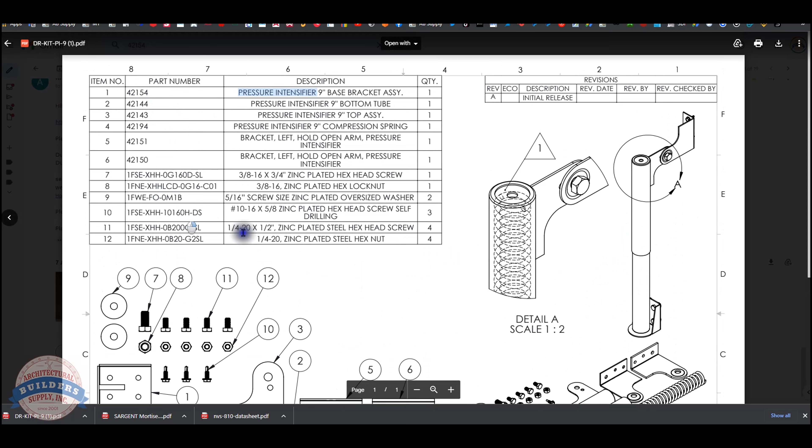All the part numbers are listed here, so if you're on a search or a hunt for replacement parts to get your unit back up and running, you will definitely want to leverage this parts drawing to your benefit.

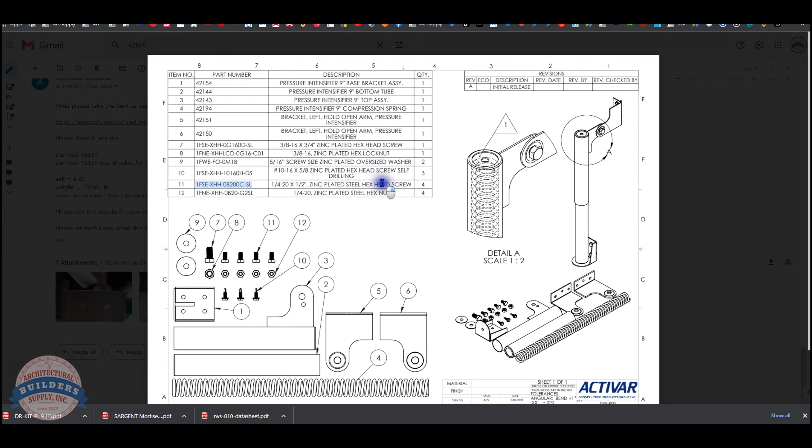When you purchase a pressure intensifier, it's not going to automatically come with this bottom tube, the base bracket, or the lid bracket, so you're going to have to pick those up separately in most instances. It also doesn't include the fasteners, so you're going to need to pick up probably this number 11 quarter-20 by half-inch zinc-plated steel hex head screw. That's probably what's going to be there. I'm quite sure of it.

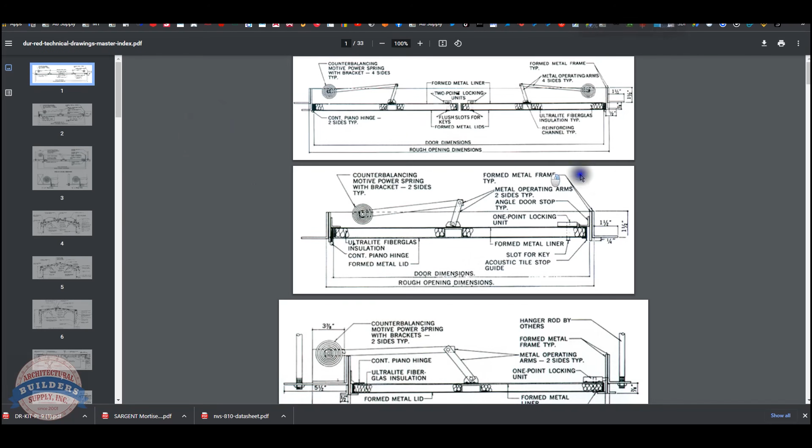Anywhere on the website where you can find the manufacturer's link, you can click on that, and then do a find function on your keyboard for Dur-Red. This link will allow you to review all the Dur-Red products we sell by means of this horizontal navigation, but also a link to the manufacturer's website, and a link to the Technical Drawings Master Index. It will show you several cross-sections of what roof hatch material looks like from Dur-Red.

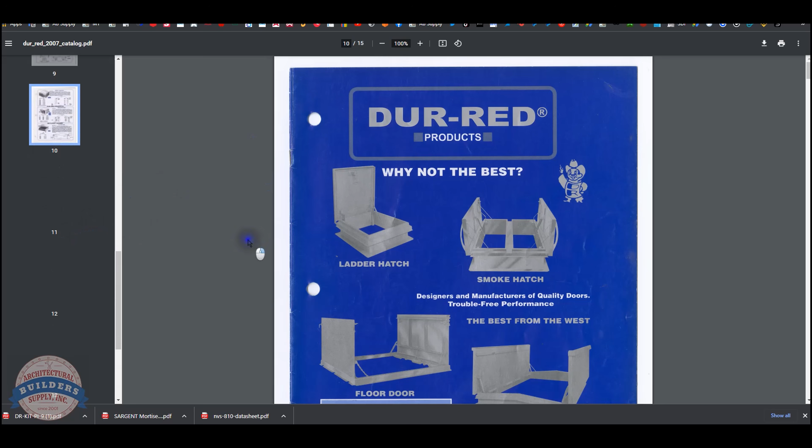There's also an older catalog here. It's 15 years old by this point, but it's actually the most current catalog that existed by the time Dur-Red was bought out by JL Industries, or Activar Industries. This is a large file - while it's only 15 pages, it's actually pretty large. With enough patience, you'll be able to review what Dur-Red was making. While this catalog is dated from 2007, it's unlikely that this has changed in several decades.

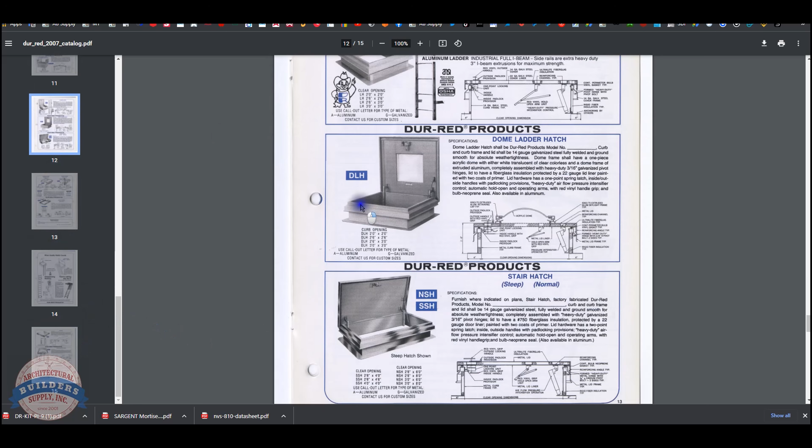Let's wrap up this video on camera.